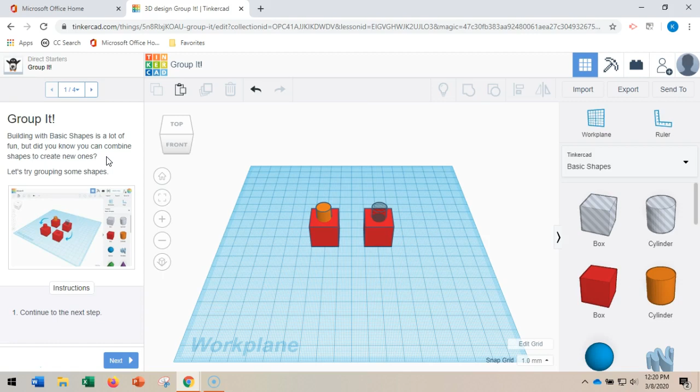Let's take a look at the directions on the left side of the screen. Group It. Building with basic shapes is a lot of fun, but did you know you can combine shapes to create new ones? Let's try grouping some shapes.

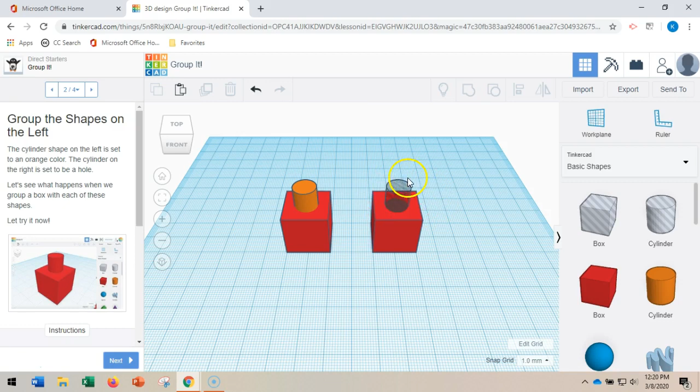Group the shapes on the left. The cylinder shape on the left is set to an orange color, so they're referring to this orange cylinder right here. The cylinder on the right is set to be a hole, so this transparent striped cylinder—if I click on it, the inspector window pops up. This cylinder is set to be a hole right now.

I could change it to a solid, and now it's identical to the one on the left, but it needs to be a hole. The reason it needs to be a hole is because the goal of grouping these two objects together—this transparent hole cylinder and this box—is that when we group them together, there's going to be a hole in the center of the box, which is a really useful tool in Tinkercad. So let's go back to the directions.

Let's see what happens when we group a box with each of these shapes. Let's try it now.

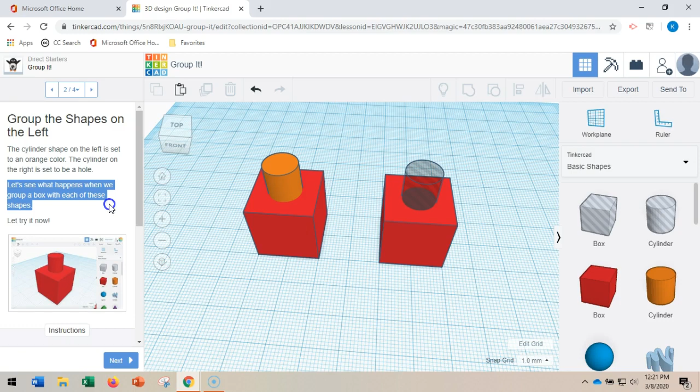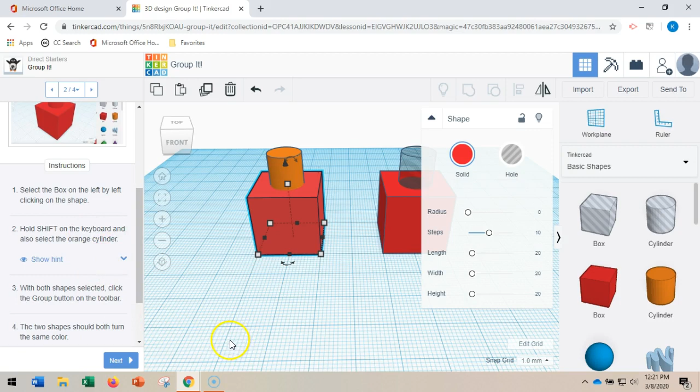Select the box on the left by left-clicking on the shape. So I'm going to click on this box. It's now selected because the handles pop up and the shape is outlined in blue. Next, hold Shift on the keyboard and also select the orange cylinder. If I hold down Shift and click on the orange cylinder, that cylinder is also now selected, and again you know it's selected because it's outlined in blue and the handles appear.

With both shapes selected, click the Group button on the toolbar. The two shapes should both turn the same color. If I go up here, this is the Group button right here. So if I click on that, the object is now grouped together and both shapes turn the same color.

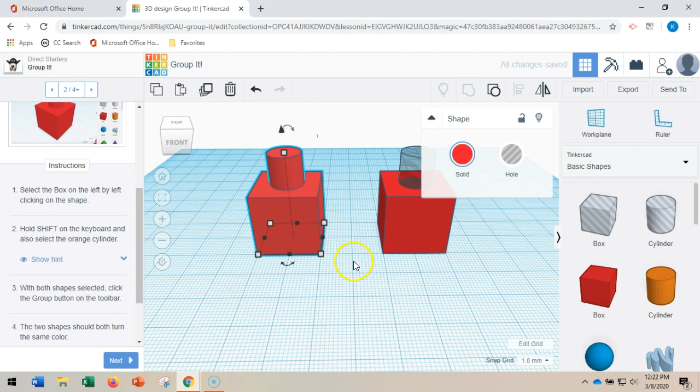Continue to the next step. Group the shapes on the right.

Now let's try the same steps with the shapes on the right. The instructions are going to tell me the same exact thing: hold down Shift, click on the box, then hold down Shift again and click on the hole cylinder. However, there's another way that I can group objects together, which, depending on what you are designing, is sometimes a little easier.

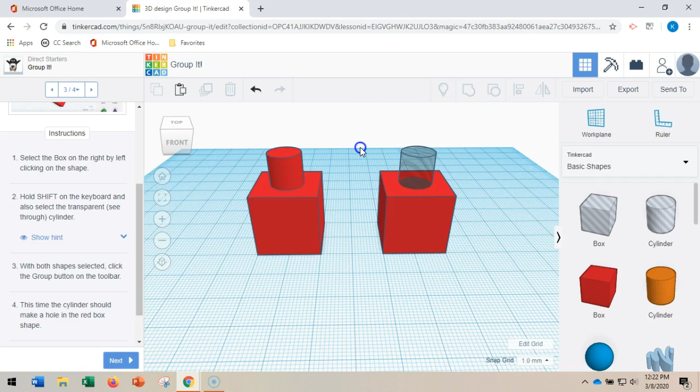So I'm going to go outside of the shapes, kind of like I'm taking a snip—I'll click and hold my mouse and drag this dotted red line around both shapes. Now, as you can see, both shapes are again selected. If I click on the Group button here, they are grouped together, and now the transparent cylinder is gone, and in its place is a hole in the center of that box.